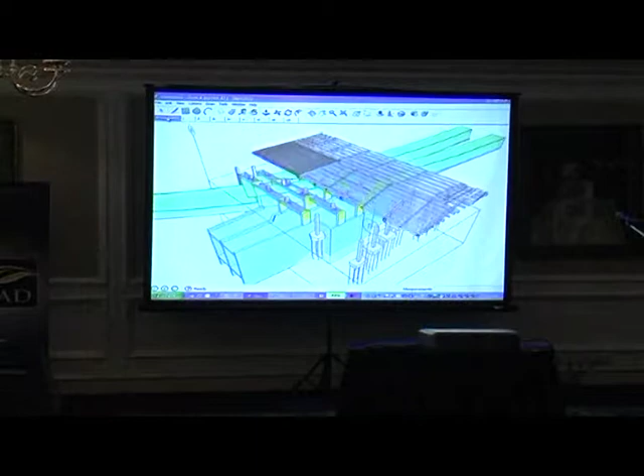This is not a video, this is actually a live model of a structure that we're doing on a project in Hong Kong.

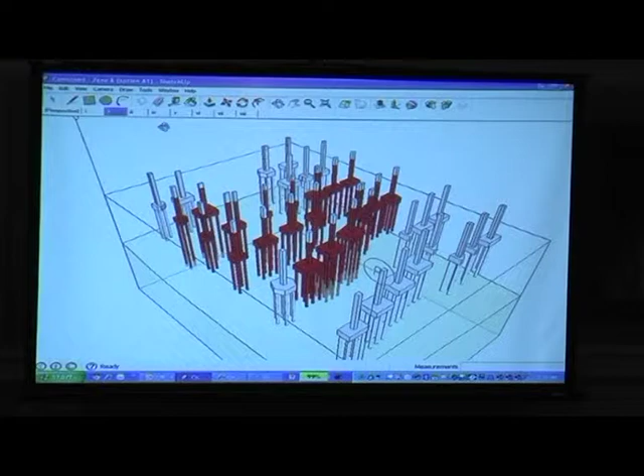This is having to build new railway tunnels underneath an existing structure. The existing structure looks like that. We have to take these piles, foundations out of the way. So what I want to do is get a way to communicate the solution, the difficulties, and the solution of this problem to other people. So we made this very simple model, which took about 2 days of effort to do.

It allows us to go through the sequence of construction, and we can look at this at any angle, any view we want to understand it and explain to all the stakeholders how it actually works. We go through a sequence of construction and explain that very clearly.

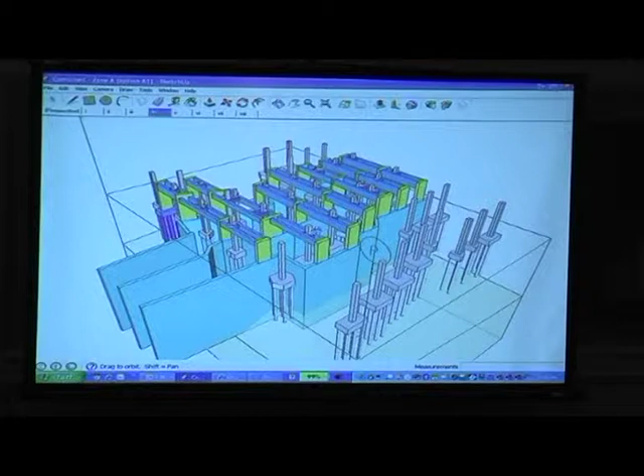In fact, the solution is that we have these little orange jacks, which jack off a new structure, lift up the roof, and we can build a new structure underneath it, cutting away existing piles, building a new structure through there to find a finished solution.

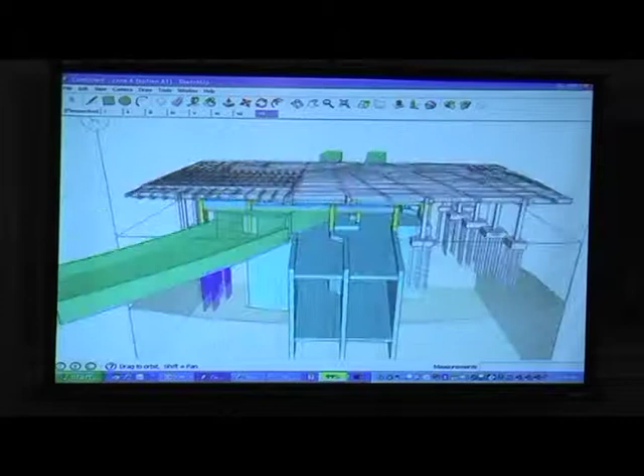And this very simple 3D model allows us to explain to all the stakeholders, the existing structure owners, the people who are affected by the construction, exactly what we're going to do, and exactly how they'll be affected by it. So a very effective way to get ideas across, a very clear way, much clearer than trying to use 2D drawings, for example.

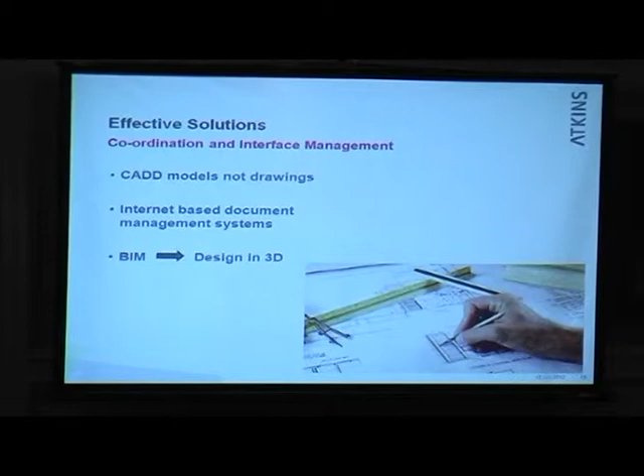Moving on to coordination issues. How to ensure good coordination in any project. Key to it is to use a coherent model of the whole project. So traditionally we've used CAD models for that. We're moving on now to use more BIM models, which are actually a 3D CAD model of the whole project.

This is an example of Dubai Metro, where we've done the design in 3D. So this is the building services in one of the stations in Dubai. And the whole design was done using some software called Revit, which allows you to actually pick out the elements of the design and make sure they fit within the structure.

So all your spatial coordination issues are resolved. You guarantee that it will fit. You don't have problems with clashes with the structure, with the architecture, building services. They fit together because you've designed it in 3D in the first place.

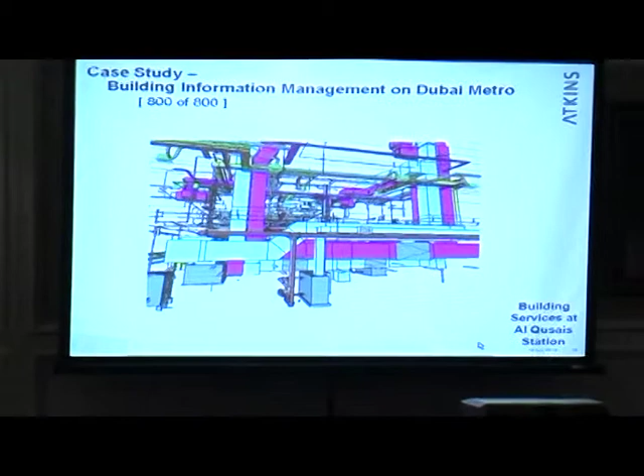Believe me, spatial coordination on site during construction is really a big issue. Traditionally, that's been one of the key causes of cost overruns on a job and program delays, in fact. Hopefully that should be a thing of the past if we adopt approaches like this.

Moving on to interface management. I talked a little bit yesterday about how important interface management was in terms of controlling cost overruns at those interfaces. How do we do that?

Well, typically we try to do quite a detailed requirement specification for each interface, using a flowchart type approach to identify who's responsible for what, what dates they have to achieve their actions by, put some damages on so that people have to pay damages if they fail to achieve their action by the required date, and then present it all in a simple flowchart so they can understand exactly what's required.

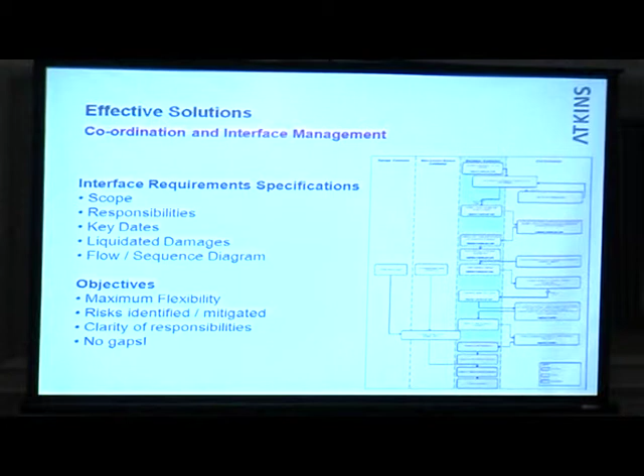And in doing so, we do want to retain flexibility as far as possible, because removing flexibility costs money for the contractors and they'll charge more because of that. So we need to make sure everyone's clear what they have to do, but give them enough space, as much space as possible to deliver those requirements in a cost-effective way.

Change control. Change control systems are really an essential part of a job. If you don't have them, you lose control. I think we heard yesterday a discussion between Marcus and Ian about how they run their change control system, and that is a really key part, again, of controlling costs and making sure that although change is inevitable, it's done in a controlled manner.

Well, start talking early and continue talking all the way through the job. So there's no surprises for anybody all the way through the whole process. Again, it's back to communication. Communicate well all through the job, and you can eliminate so many problems.

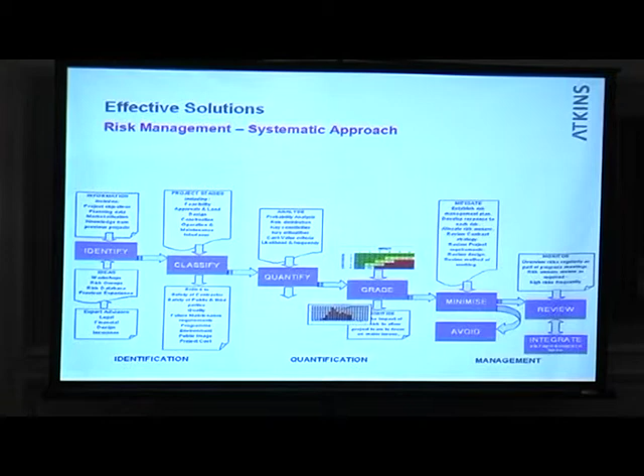This is just to highlight the fact that risks change as projects proceed. Things change. You need to be very careful that the information is still the same, but you've still got the parachute on your back instead of a bag of sandwiches if you're falling out of a plane. So continue to monitor risks throughout the project. Make sure things are kept under review at all stages. Don't assume there's no change since the last time you looked at it.

For the risks you cannot mitigate or eliminate, you need to consider the possible follow-on effects. Your overall estimate may come down as you draw on the contingency fund, reducing the amount you need to retain because those risks have already been addressed. So on a well-run project, the base estimate may increase, but the overall money you've got to keep, including contingency, should be coming down as you get to the end.

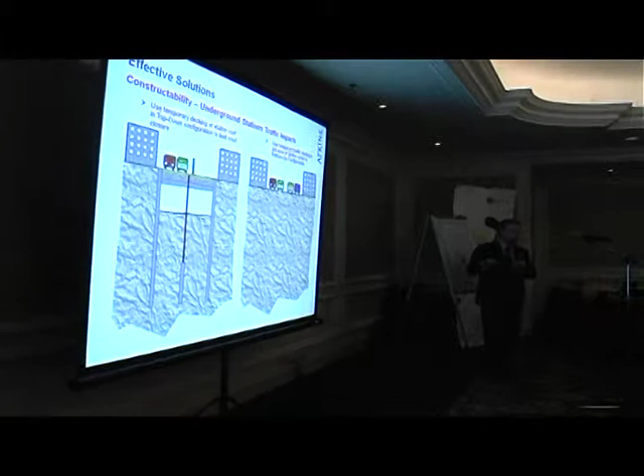Build half of the top slab of our station to start with. We then backfill that, put the traffic back over the top of it, build the other half of the top slab of the station, and then we can build underneath that top slab with the road reopened. So the impact is relatively minor and relatively short, and all the construction can then proceed underneath with much less impact.

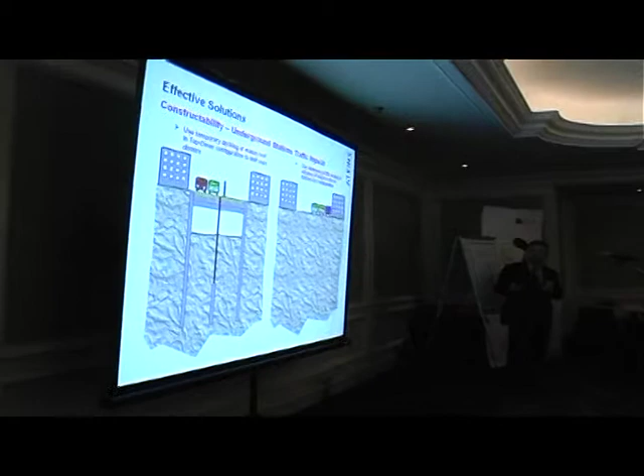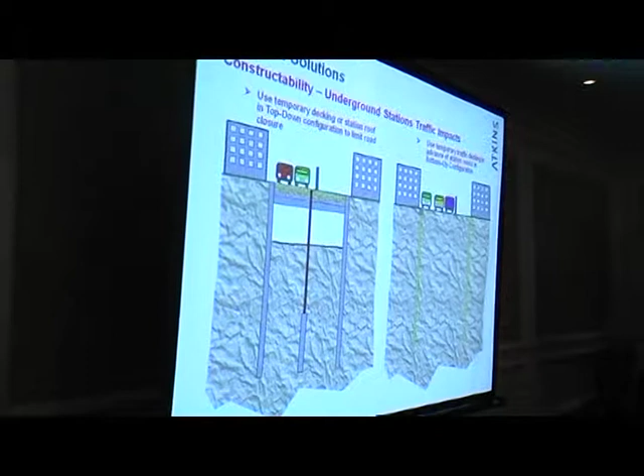If we look at the right-hand side, this is a slightly different solution, but again it mitigates the impact considerably. What we do here is put some sidewalls in to support a temporary deck - these are piles which will support a temporary deck. We're moving the traffic around to allow this to be built.

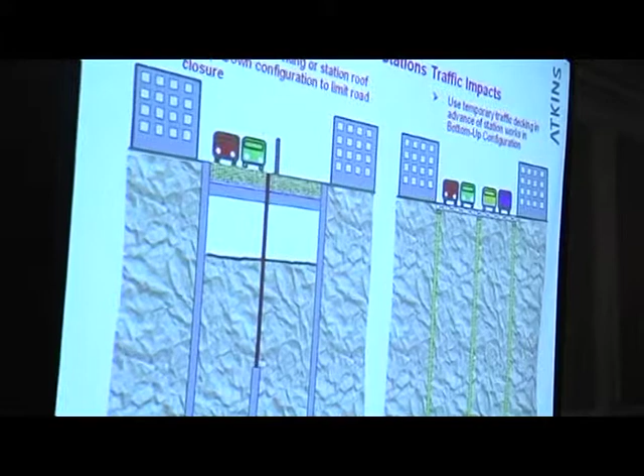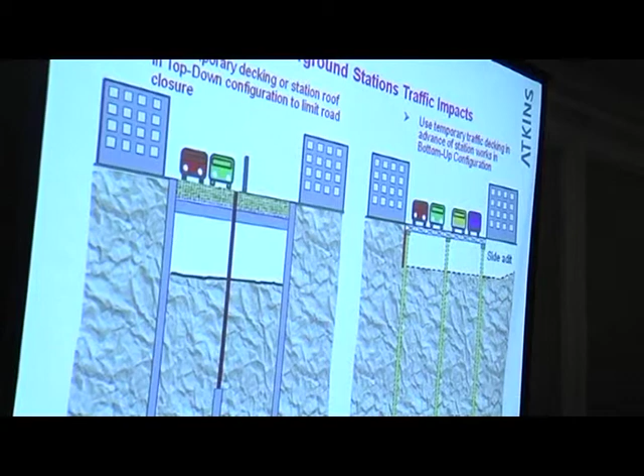We have a short closure to put the temporary deck in. We then reopen the road very quickly, probably literally a few days later. And then we come in from the side underneath the deck and build our station with the traffic running quite safely over our heads. So these are the sort of strategies you'd want to use if you have cut and cover works on a busy road.

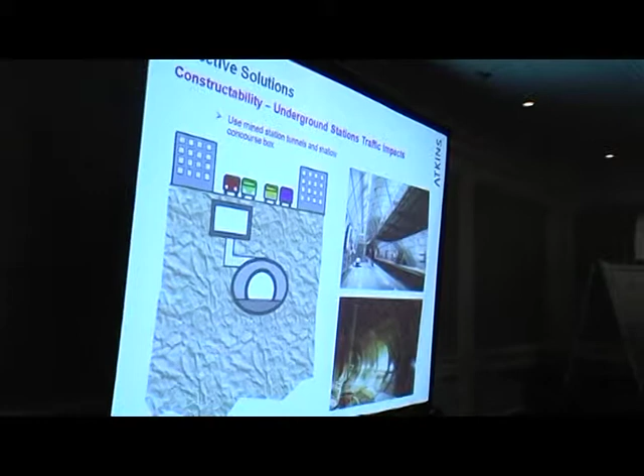Other options would be to look at building your tunnels in a heading or a mined station, perhaps with the concourse offline, out of the busy area. This depends on how deep your station is and also on the ground conditions, but it can be very successful.

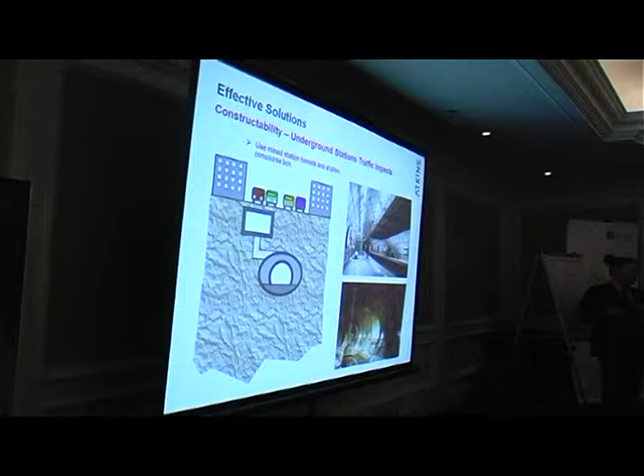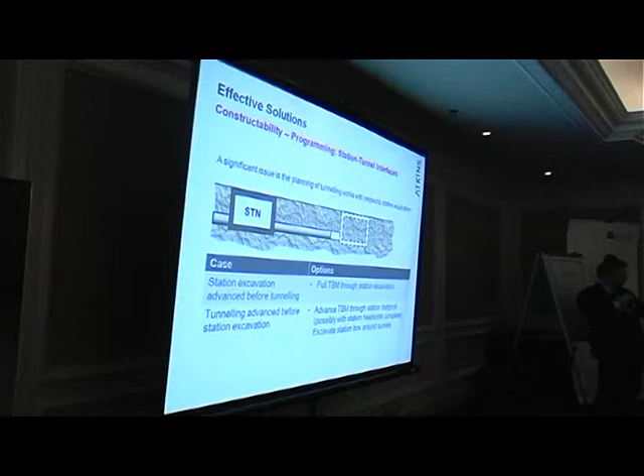Just an issue on TBM tunnels - very often the ideal solution for tunneling is really to use a TBM, a tunnel boring machine, which doesn't require the road to be opened. When you get to a station box, you have to consider the interaction of that tunnel boring machine with the station box. So there are two cases really.

One where the station excavation is in advance of the tunnel boring machine. What we did in Dubai quite successfully was to drive the tunnel boring machine into the station box, pull it through the station, and relaunch it on the other side. The stations then have to be made a bit deeper and larger to allow the tunnel boring machine to fit through, so this had to be designed right from the start to allow the contractor to build it large enough.

The alternative would be you have to build a shaft outside the station box.